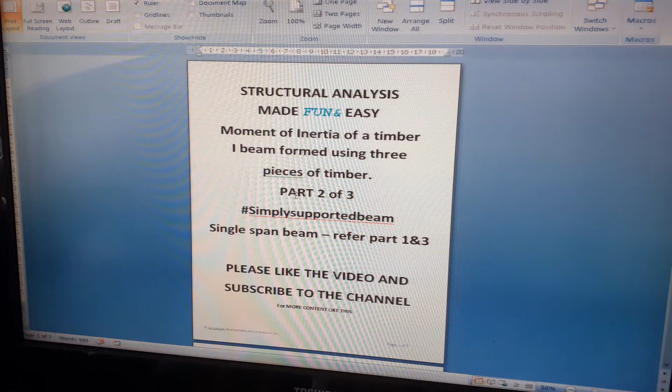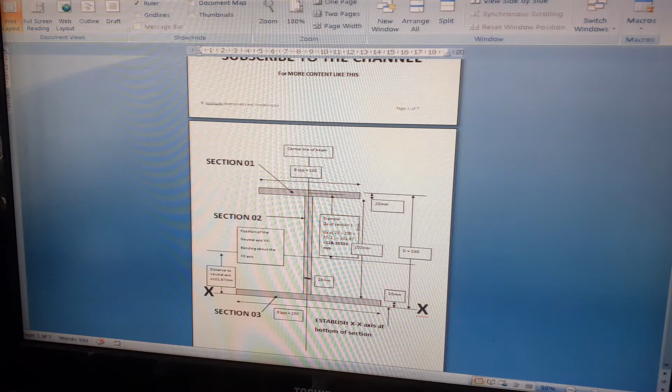Just tried to smarten up the presentation a bit. So I'm still tagging this simply supported beam because if you look at part 1 and part 3, there's a little bit more about simply supported beam analysis. So basically in this question we were asked, this is part C: determine the second moment of area of the cross section about the neutral axis.

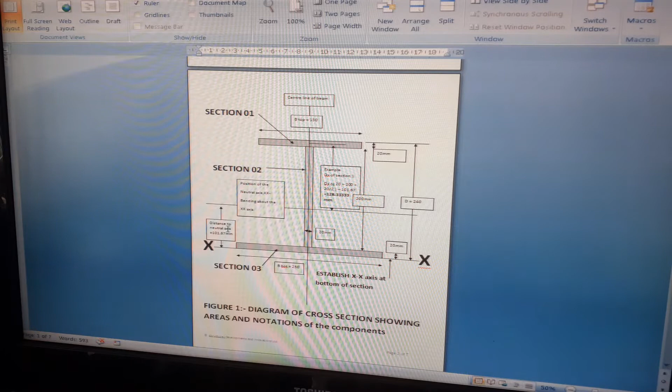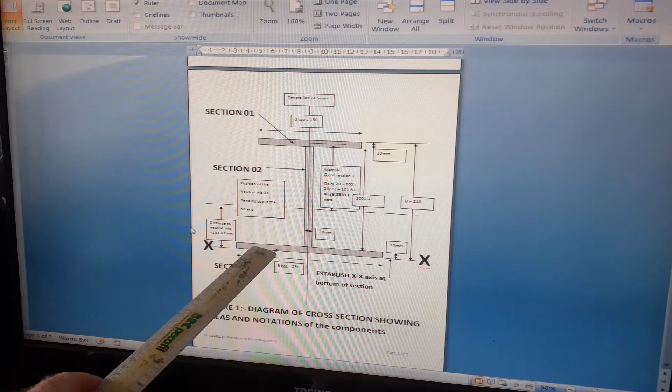So in the previous video I determined the position of the neutral axis, and as you should be able to see there, the position of the neutral axis is 101.67 millimeters above the bottom of the section. So just to recap, we got an I-beam. It's made of three sections of rectangular timber. That's section 1, section 2, section 3, and it's glued together at the joints where the web is glued to the flanges.

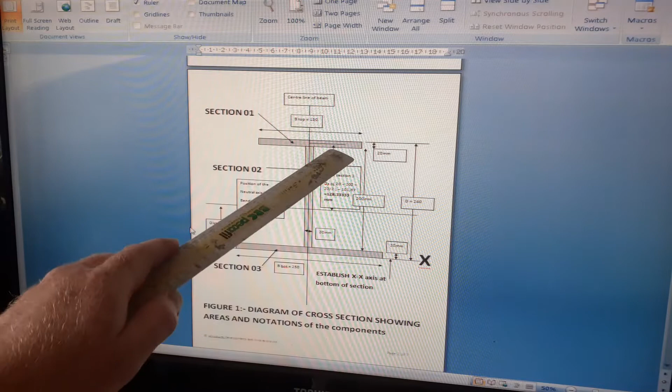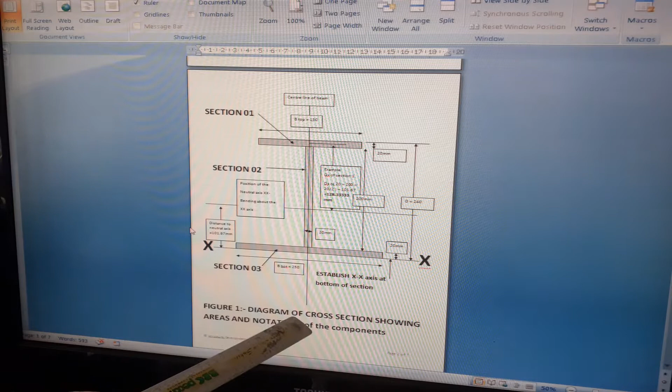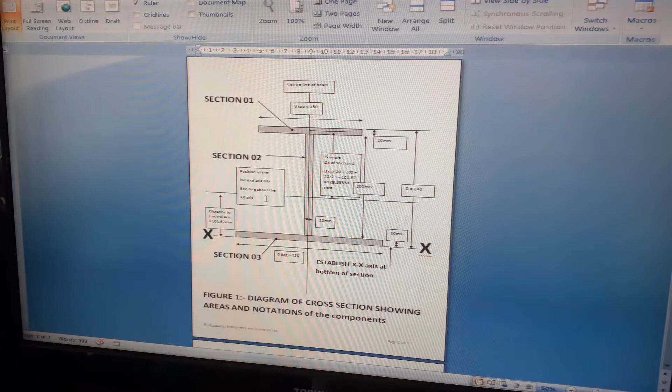This is the top flange and the bottom flange. That's 250 wide by 20 millimeters. The overall depth of the section is 240, the width of the top flange is 150, and the width of the bottom is 250. This is just the diagram of the section showing the areas and the notations of the components. So now we've got to calculate the moment of inertia about the x-axis neutral axis.

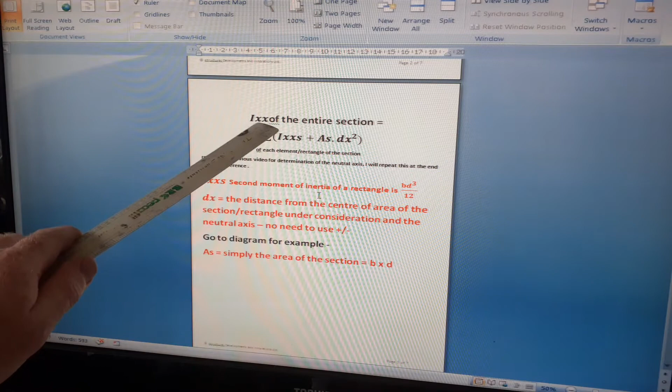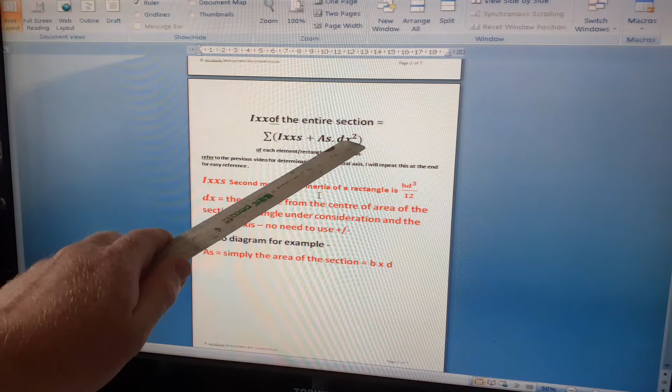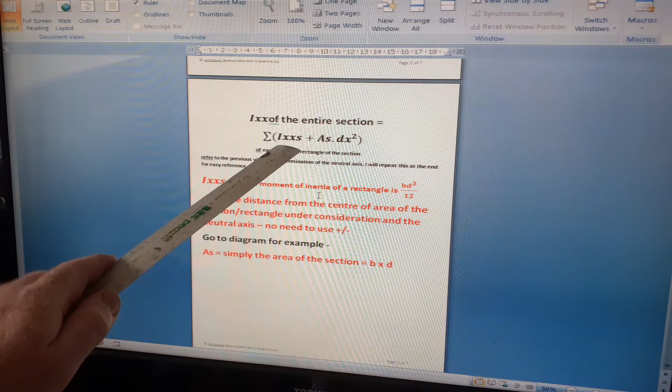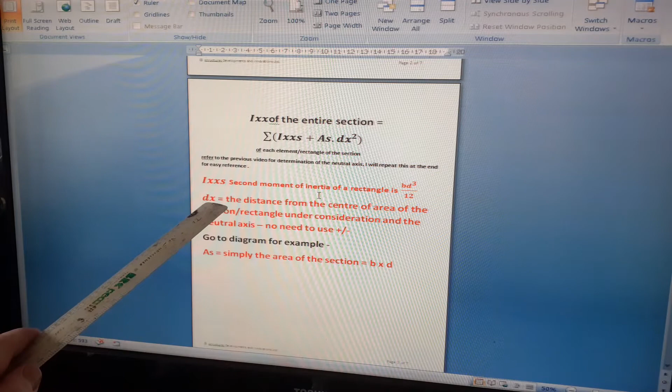So to do this, the second moment of area of the entire section is equal to the sum of the Ix of each section plus the area of the section times the dx squared of each section, and then we add them all up to give us a total value. The Ix of each section is the second moment of inertia, and because they're all rectangular, that's BD cubed over 12. The dx is the distance from the centre of area of the rectangle under consideration to the neutral axis. There's no need to use plus or minus in those calculations.

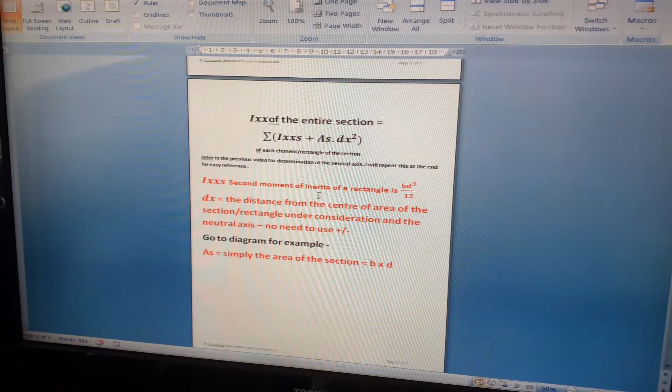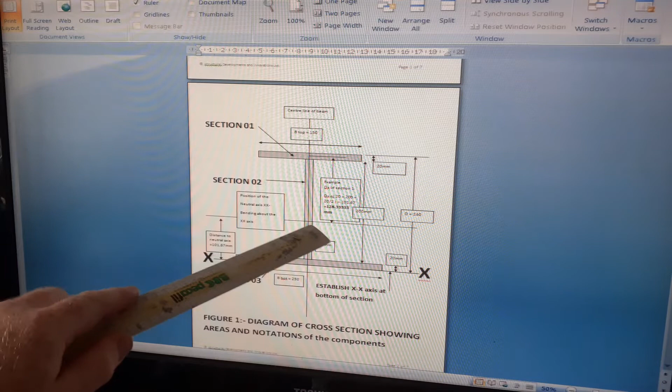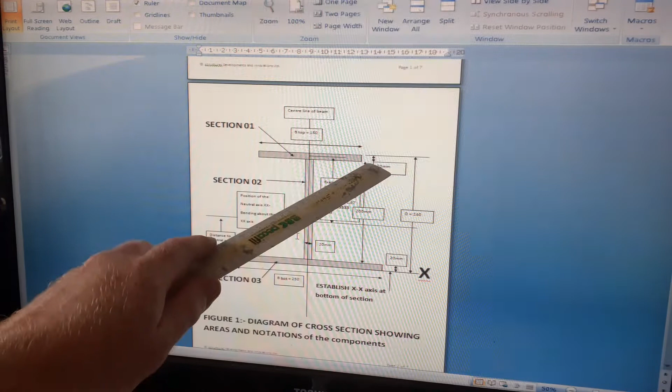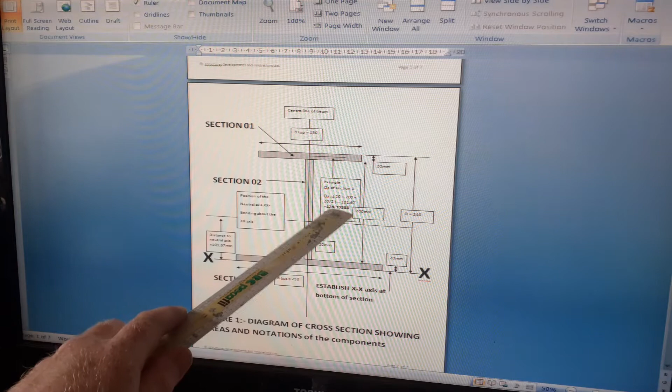So just to show an example. For section 1, dx is equal to the distance from the neutral axis, which is 101.67 above the base, to the centre of area of the first section. That's equal to 20 plus 200 plus 20 over 2, which gets you to the centre of area of section 1, and then minus 101.67, which is 128.333 millimeters.

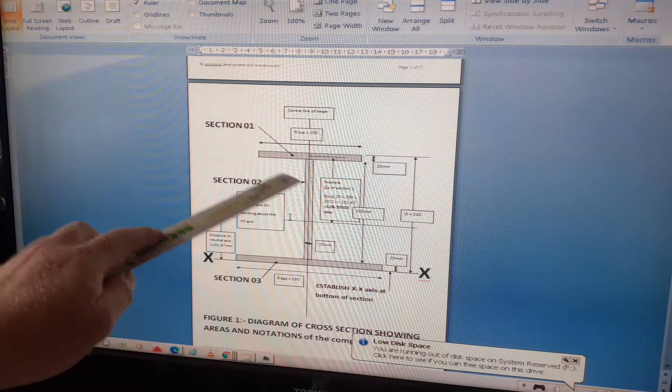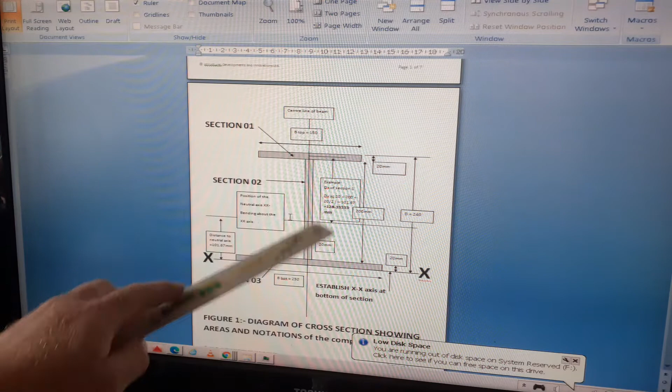For the other sections, you just keep on doing the same thing. The dx is just the distance from the neutral axis to the centre of area of the section. So for section 1, the centre is 20 over 2. Section 2, the centre is 200, d over 2. The same thing with this one, d over 2 is the centre.

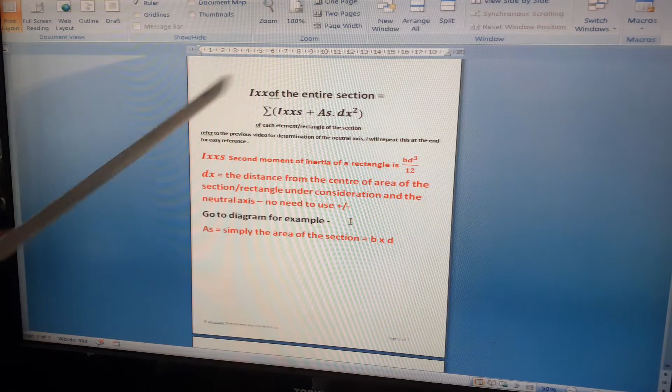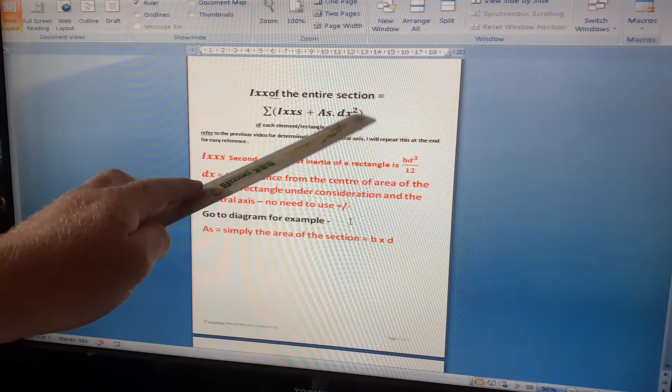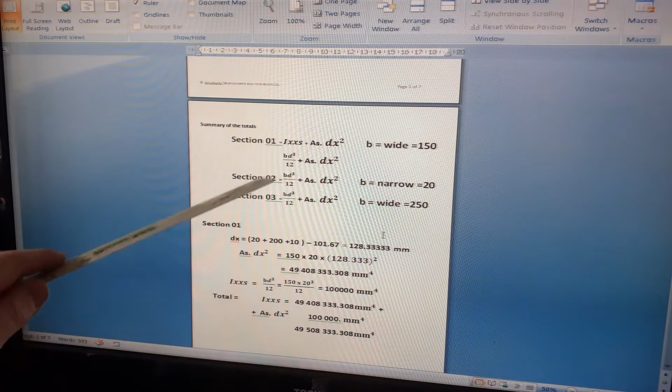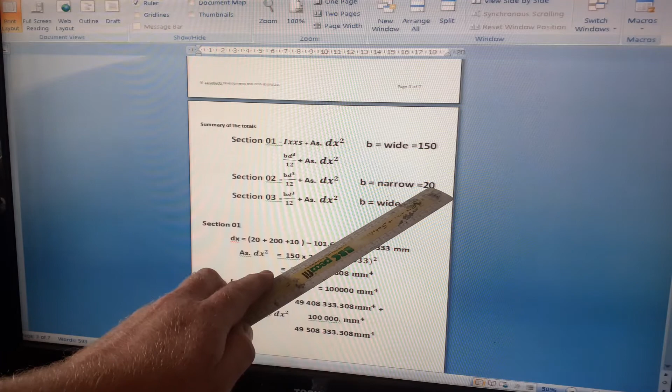Back into the equation. The Ixx of the entire section is the total of Ixx of s plus As dx squared, and As is simply the area of the section under consideration. So all we have to do is work out Ixx plus As dx squared for each section. For section 1, Ixx for a rectangle is BD cubed over 12. For the first section, it's 150 wide times 20. For the second, it's 20 wide times 200 deep. And for section 3, it's 250 wide times 20 millimeters.

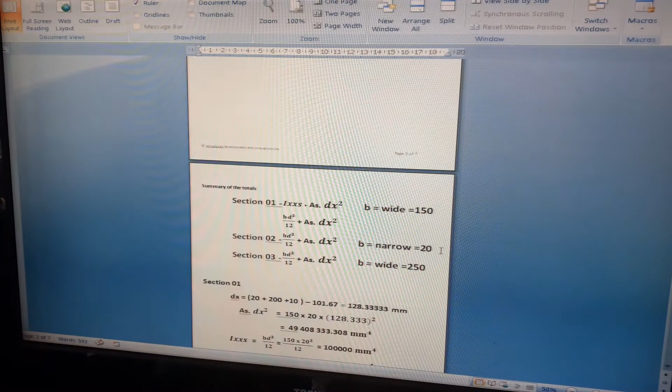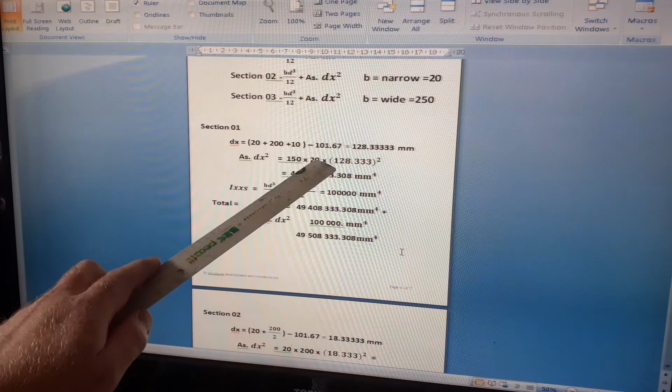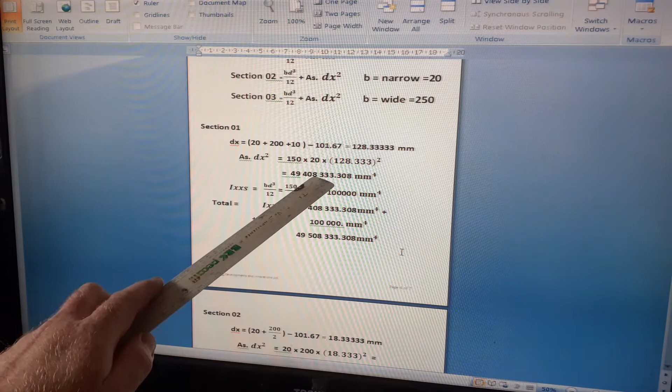So section 1, dx is 20 plus 200 plus 10 minus 101.67, which is 128.333. As dx squared is therefore 150 wide times 20 deep times 128.333 squared. With a calculator, you get 49,408,333.308 millimeters to the power of 4. And Ixx for section 1 is 150 times 20 cubed divided by 12, which gives you 100,000 millimeters to the power 4.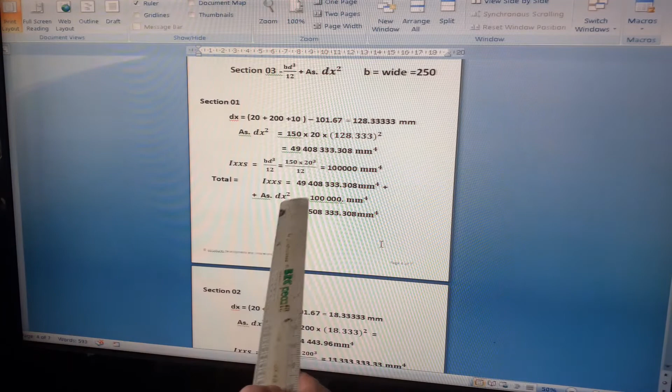So the total Ixx contribution for this section is 49,408,333.308 plus 100,000, which gives you 49,508,333. So just repeat the process for the other two sections. You got dx equals 20 plus 200 over 2 minus 101.67. I'll put the text in the description of the video.

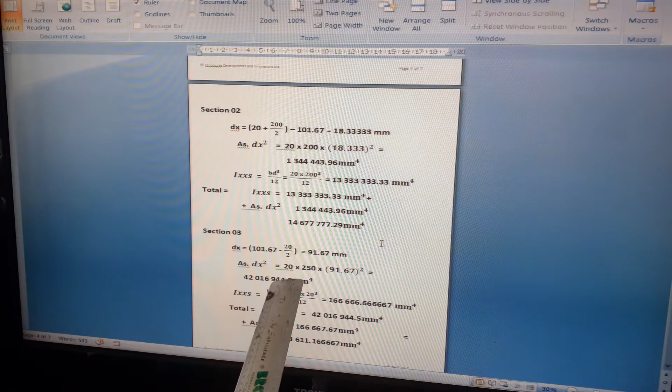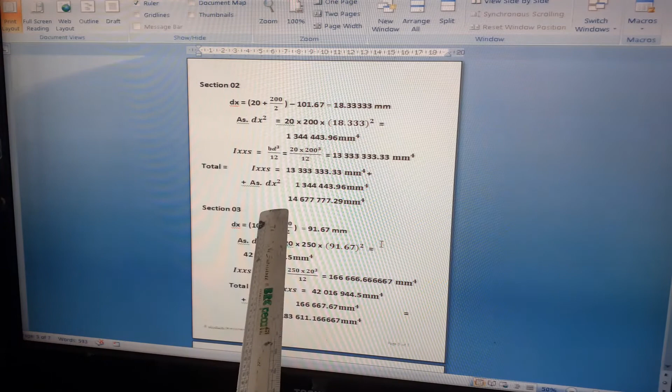Then Ixx equals BD cubed over 12 for section 2, which is 20 times 200 to the power 3 divided by 12, which is 13,333,333.33. And As dx squared for section 2 is 20 times 200 times 18.33 squared. That's 1,344,443.96. When you add them together, you get 14,677,777.29 for section 2.

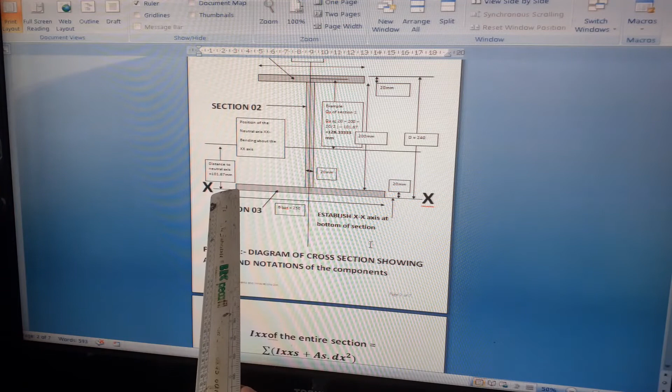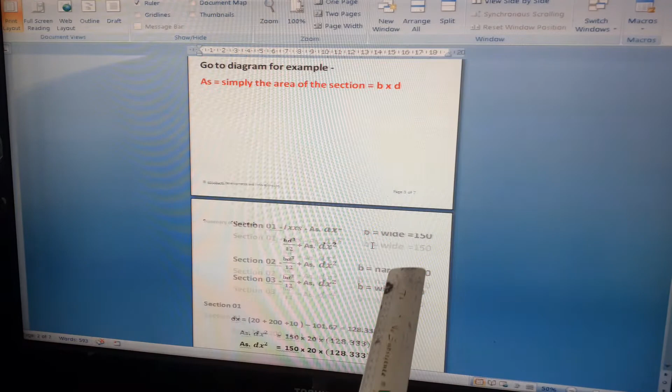Then finally for section 3, dx is equal to 101.67 minus the distance from the bottom to the middle of section 3, which is 20 over 2, so it's 101.67 minus 10, that's 91.67. So As dx squared is 20 deep times 250 wide times 91.67 squared.

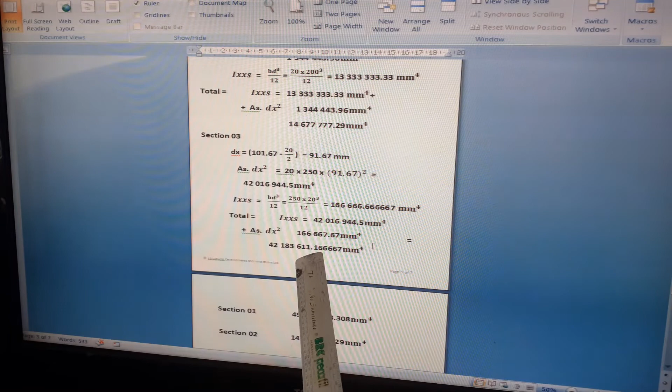That equals 42,016,944.5. And the Ixx equals 250 wide times 20 to the power 3 divided by 12, which is 166,666.666. So the total contribution for section 3 is 42 million plus 166.6667 thousand, which equals 42,183,611.1667. So then we just add them up to get the total Ixx value.

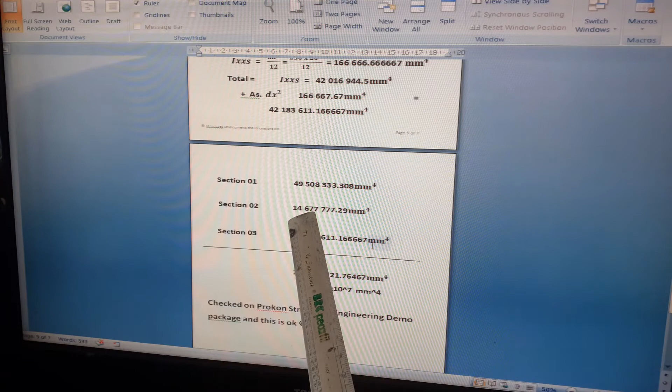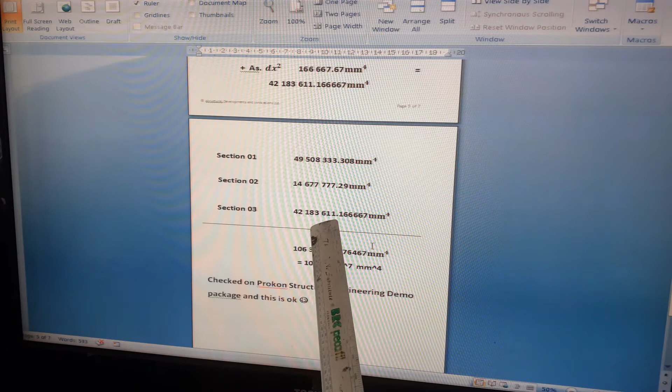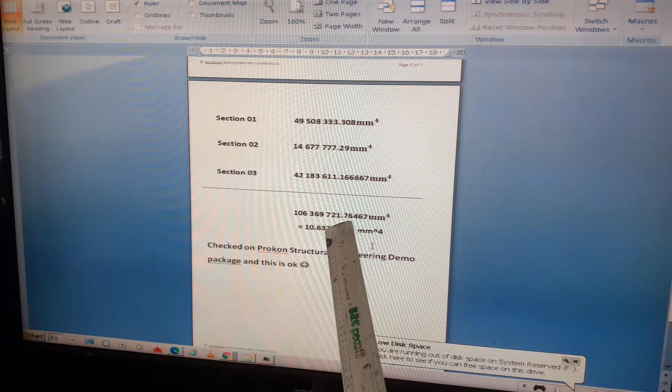Section 1 we calculated was 49,508,333.30 plus 14,677,777.29 for section 2, and then 42,183,611.16 for the final section. So the total of that is 106,369,721.76467 millimeters to the power of 4.

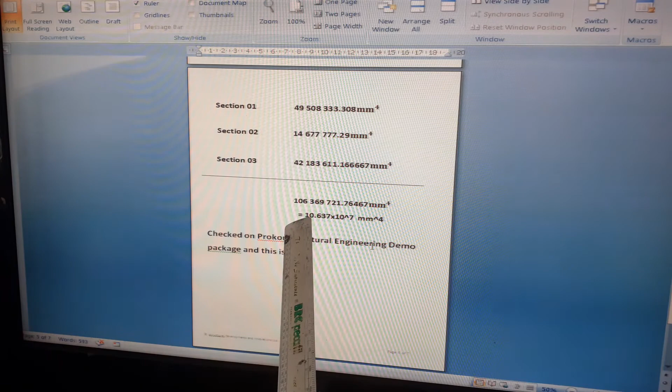I know this is correct because I checked it using the Prokon Structural Engineering demo version. So the answer rounded, you could say 10.637 times 10 to the power of 7 millimeters to the fourth, or 1.0637 times 10 to the power of 8. So that's how you get the answer.

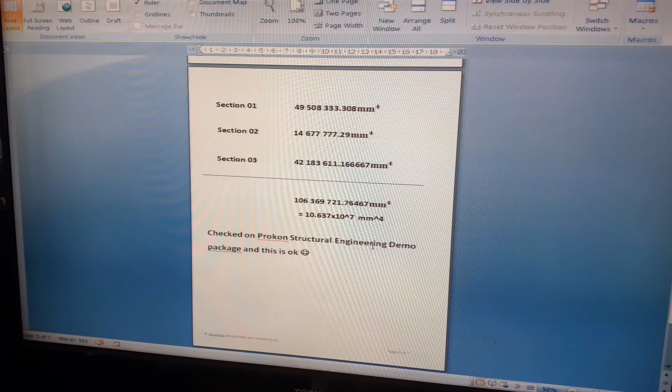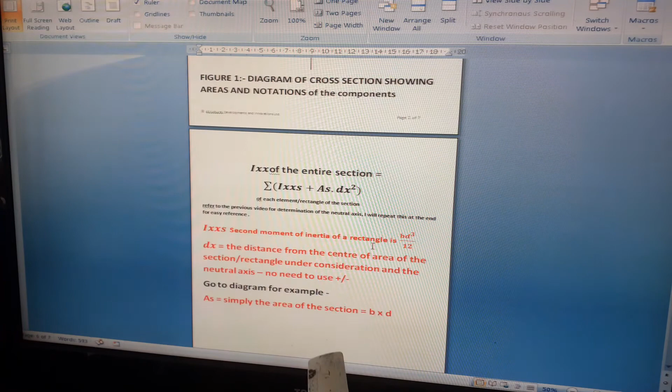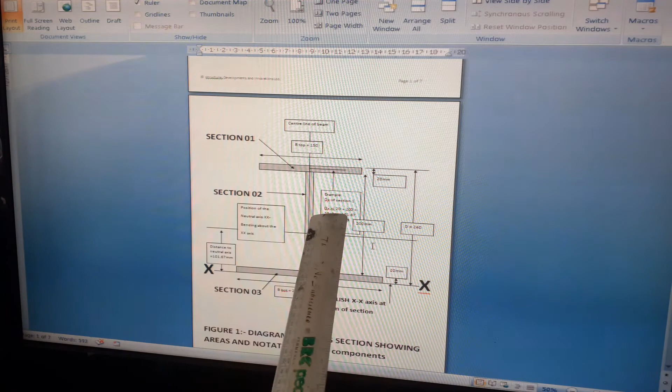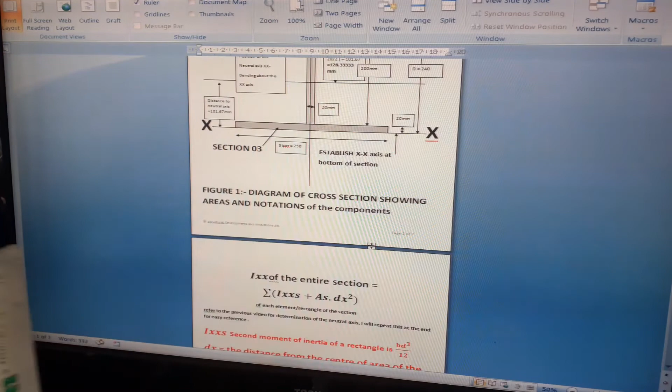It's pretty easy to calculate the second moment of area. Just split the section up into 3 rectangles, and then work out the Ixx about its own axis plus the area times the square of the distance between the centre of area of the section and the neutral axis, and that gives you the entire second moment of area.